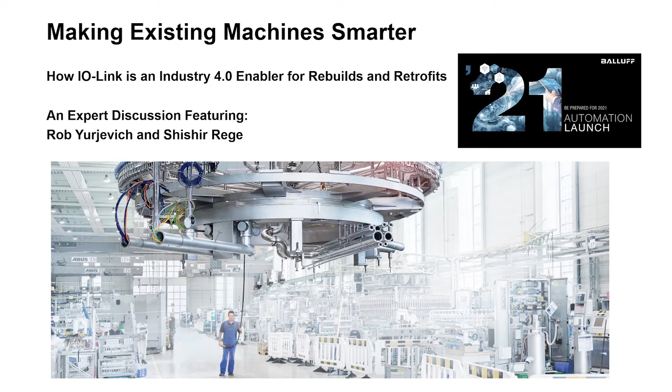And Rob, my first question is going to be for you. Why are manufacturers looking to make their machines smarter? What are the trends that you see in the industry? Sure, thanks, Chris. Some of the major trends we're seeing are workforce attrition leading to brain drain. So experienced operators and maintenance people are leaving the workforce, and with that, tribal knowledge about that factory or even about a machine is going away.

Additionally, there's a lot more need for shorter runs in manufacturing, in consumer packaged goods. And there's more personalization. Consumers are driving demand for more package options, and that results in a lot more changeover. They're having to change machines over more frequently. And more manufacturers are starting to explore how to implement digitalization in their operations.

So as a result, with those trends, consumer packaged goods and food and beverage manufacturers want machines that are easier to operate and maintain. That translates to things like getting more health information from machines to enable guided maintenance or even predictive maintenance, enhanced flexibility and agility, so faster changeovers, error-proofing changeovers through automation or operator guidance. And then with regard to industrial Internet of Things or Industry 4.0, some of the concepts we're seeing customers implement are things like visualization, remote access, or even augmented reality.

But unfortunately, with the traditional way of communicating with the sensor, which is analog or digital, for example, we can only receive the process data. And the choice we made with that communication basically restricts us in getting all the other information that the sensor collects. By switching to IO-Link, we kind of unleash the sensor's true potential.

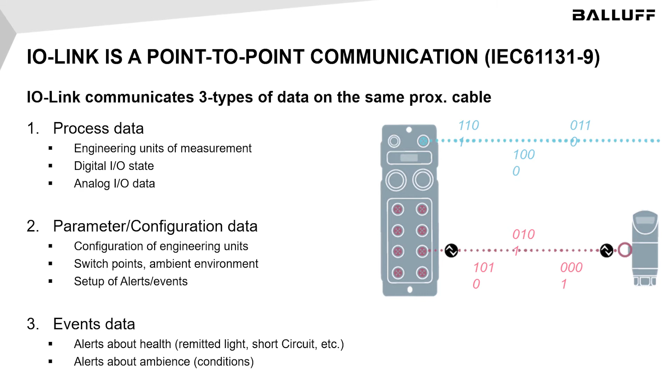IO-Link offers bidirectional data communication instead of a signal communication. So we can configure the sensor, we can set alerts, we can get the process data in actual engineering units so that we don't have to convert or scale the data that we were receiving earlier. Of course, IO-Link is a lot more than that, but to give a short answer, it's basically a data communication that allows the sensor to provide a lot more diagnostics and process information that we never had before.

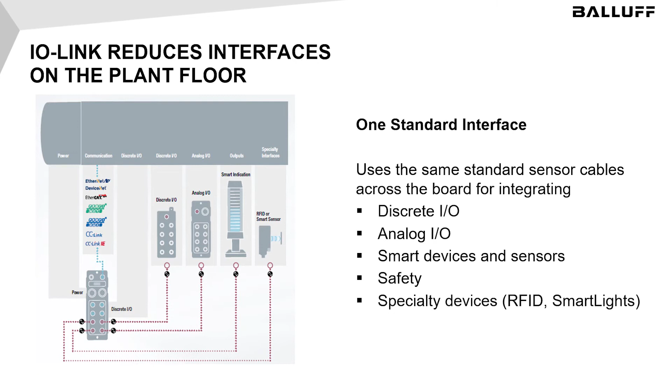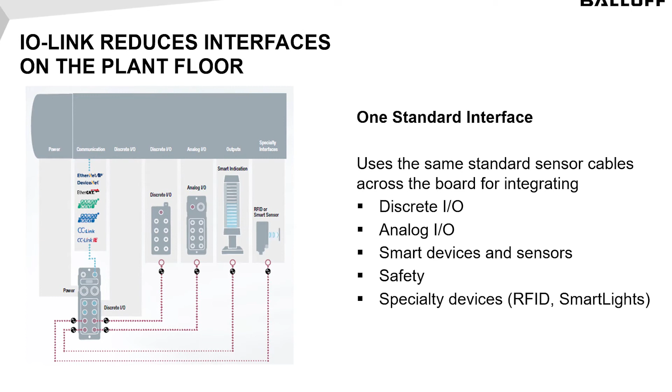And so, Shishir, if the customer wants to use IO-Link for simplifying their network architecture, do they have to use IO-Link sensors instead of standard sensors like proxes and photo eyes and analog sensors? That's a good question. Well, IO-Link is very flexible and it can interface with a wide variety of devices such as your discrete I/O, analog I/O, valves. So you don't have to change your existing devices to incorporate IO-Link. IO-Link resides next to the existing devices and still offers the full functionality, even if you're choosing it for entire controls architecture.

So a quick example is if you want to incorporate a condition monitoring sensor that provides vibration and temperature or humidity data, you can just add that sensor to your existing architecture to get the capabilities that you need. Does that help? Okay. Yeah, I think that answers my question.

Rob, do you know of any examples using IO-Link like that you could share? Sure. In the case of a rebuild or a retrofit, I can give a few different examples. I mentioned that changeover is a big area of improvement in food and beverage manufacturing. And so IO-Link has started to be used a lot for changeover and recipe changes. An example of this is with a photo eye application.

Sometimes if you've got a package color change, maybe you've got a bottle that changes from clear to shiny. In a normal situation, an operator or a maintenance technician would have to go out to the sensor when they were changing from recipe A to recipe B and adjust the potentiometer on that sensor. Now, with IO-Link, we can link the set points to the recipe such that when they change the recipe on the machine, the new set points are already sent to the sensor with no manual operator intervention, which eliminates the chance for errors and even the time it takes to walk out to that sensor and make that adjustment.

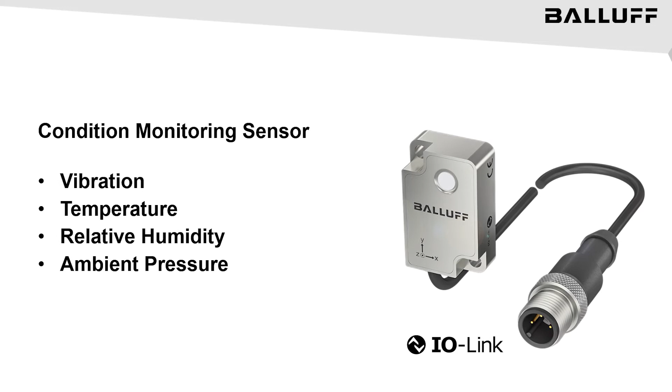Shishir mentioned environmental monitoring. There are sensors available that can monitor vibration, temperature, relative humidity, and it provides insights into the machine performance, and the end user can generate alerts based on some preset thresholds. In short, what we're enabling is the machine to tell you it's going to fail before it fails.

That's interesting, the way that it can tell if it's dirty or anything like that. Well, Shishir, how can IO-Link help with ease of maintenance? Good question, Chris. So there are multiple ways IO-Link can help with maintenance or ease of maintenance.

First, it offers that automatic device replacement feature, which is built into all IO-Link devices. What it allows you to do is, if a device fails during operation, all you have to find is the right type of device, and you plug it in, and the IO-Link gateway can automatically re-parameterize that sensor to get the right parameters set up. So you don't have to toggle the switches or do anything, no calibration necessary. All of it is done for you automatically. So that's one way that it helps with ease of maintenance.

The other is IO-Link has spurred a lot of innovation in the automation area. There are lots of process visualization devices. For example, Balluff's smart lights is a great example where you can actually set some information that allows maintenance people to be alerted ahead of time that there are going to be some problems.

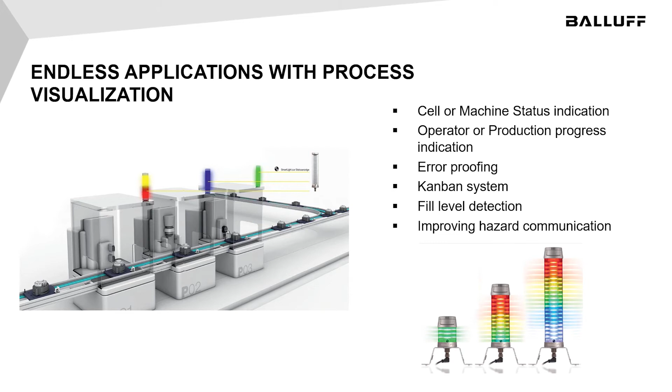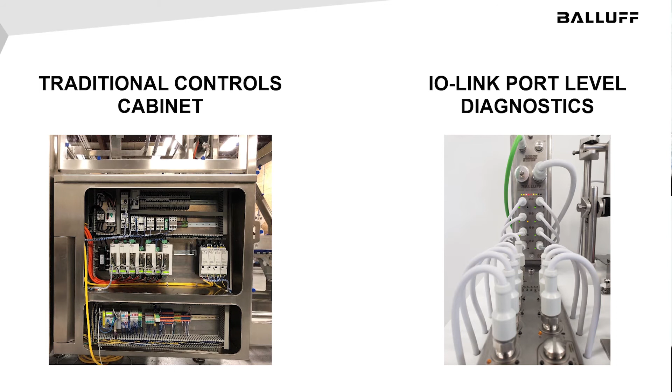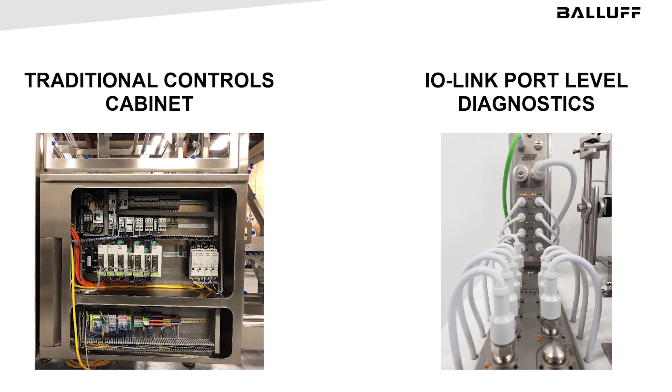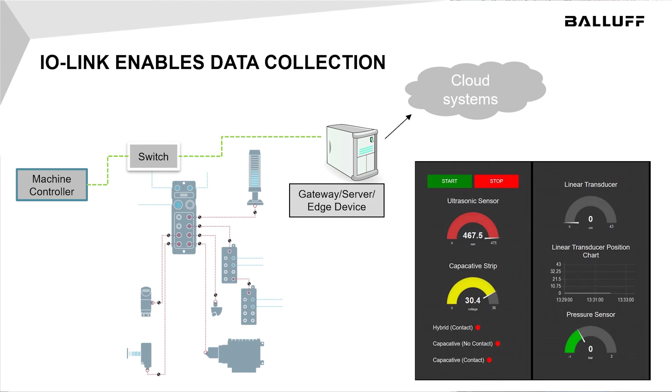The other side of IO-Link is IIoT-ready applications. Since it's data communication, there is a lot of data IO-Link can collect. The gateway modules can transfer that data to third-party software or tools where you can build dashboards for alerts and maintenance. So there are multiple ways IO-Link actually helps ease the maintenance of the machine or even the entire plant floor.

Okay, Shishir. Well, I'm going to get a little bit more technical. I want to ask you specifically, if customers have EtherNet/IP or PROFINET or EtherCAT, how can they integrate IO-Link? Very good. So IO-Link is a device-level technology. The networks that you just mentioned, EtherNet/IP, PROFINET, or EtherCAT, are all control-level networks. So IO-Link sits underneath those networks, and it is completely transparent to any of those networks. So it works well with all the networks that you mentioned and more.

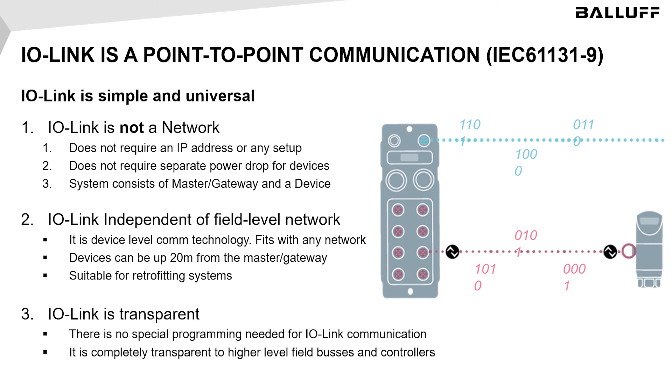In fact, it actually enhances the performance of these networks by helping to reduce the number of network nodes that are on the plant floor or on the machine itself. So that way you have fewer nodes, fewer IP addresses to manage. So that helps you keep your cost of integration down, as you don't need so many managed networks or managed routers and switches and things of that nature. So yeah, that's a very good question, Chris. So IO-Link is completely transparent.

Okay. And Rob, I'm going to ask you this: is IO-Link available to critical areas of packaging, food, and beverage, such as high pressure washdown? Yeah, absolutely, Chris. And it's important. IO-Link gateways and devices are available with IP69K ratings for washdown. The presentation later today will be on our new SAMS product line, which is even going to have enhanced IP69K ratings for greater life and resistance to those environments. And we're continuing to evolve this portfolio to include more and better hygienic designs as well.

Okay. Well, Rob, can you summarize what types of applications IO-Link can enable for packaging, food, and beverage manufacturers? Yep. We've already mentioned condition monitoring for predictive maintenance, ease of maintenance, and improved changeover. But IO-Link can also enable things like traceability, access control, change part identification for error-proofing processes, and even automated tool changing for robots. Okay. Do you all have any closing thoughts that you would like to leave our viewers with?

Sure, Chris. I'll go first. It's very important to look at IO-Link as a technology enabler because it not only solves today's problems, for example, simplifying the architecture, simplifying wiring, reducing the overall cost of your systems architecture. It adds lots of maintenance features. But on the other side, it also enables you for tomorrow's applications, for data collection, that allows you to have predictive analytics in future, predictive maintenance, remote diagnostics, and many more applications.

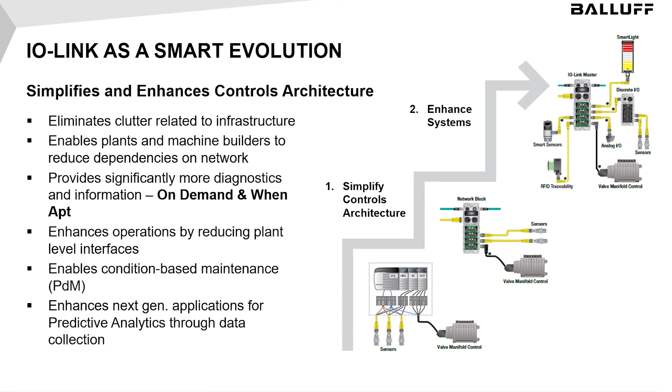As an industry, we are barely scratching the surface with the innovation that IO-Link has started. And I'm sure it will continue on for a decade to come. So with that, I think it makes sense to look into IO-Link further. Rob?

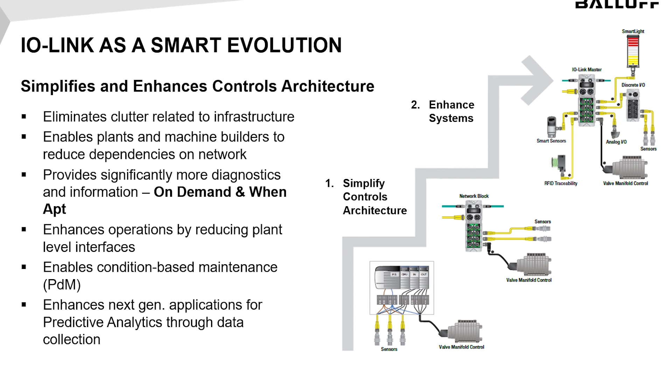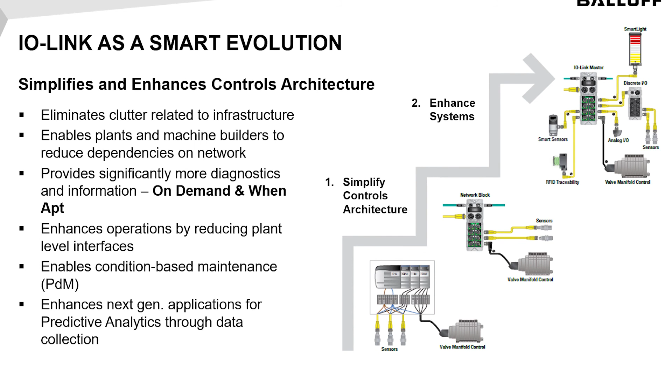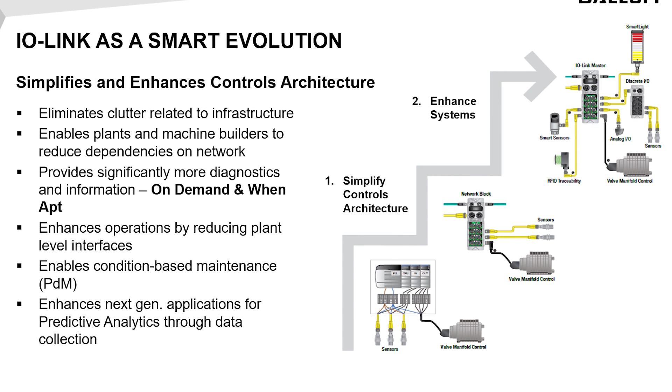Yeah, well said, Shishir. And I would just add that if customers out there are looking to take an existing machine that they can't yet replace with new equipment, but make it smarter in some way to reduce downtime, to improve condition monitoring functionality, they should really take a hard look at IO-Link. It's an easy, intuitive way to wire up the machine, but when they select the right sensor, they can also bring that smart machine functionality to the table, whatever that is in their situation, and realize some improvements in their productivity and uptime.